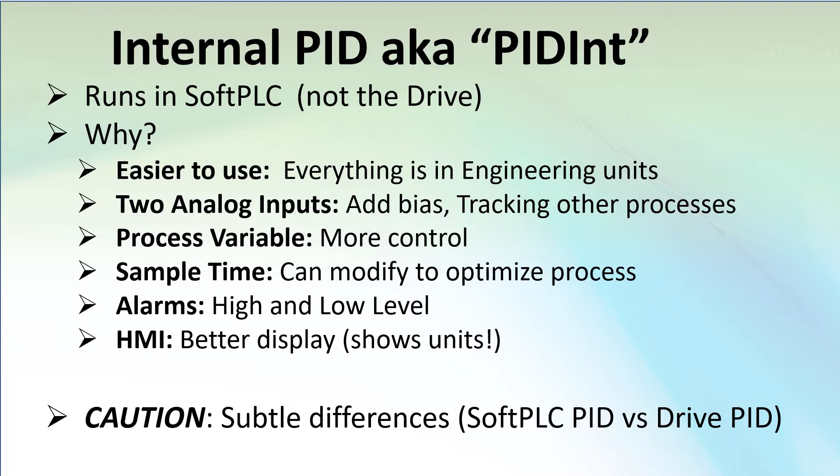Now there's a lot of subtle differences between this Soft PLC PID implementation and the one that's in the drive. So you can't just take the drive's version and copy it directly over to the Soft PLC version, what the manual calls the internal PID version. So if you're thinking about using the Soft PLC version of PID, it's really worthwhile to take a few minutes to watch this video where I point out all those differences and subtleties. It'll save you a lot of headaches.

Here we go. I'm using the exact same hardware that we used in the PID Quick Start video in part 1, which is interesting because the I/O card that comes with that drive only has one analog input. That's important. If you aren't going to use the second analog input that the internal PID implementation has, which we aren't in this demo, then you don't have to buy an I/O card with two analog inputs.

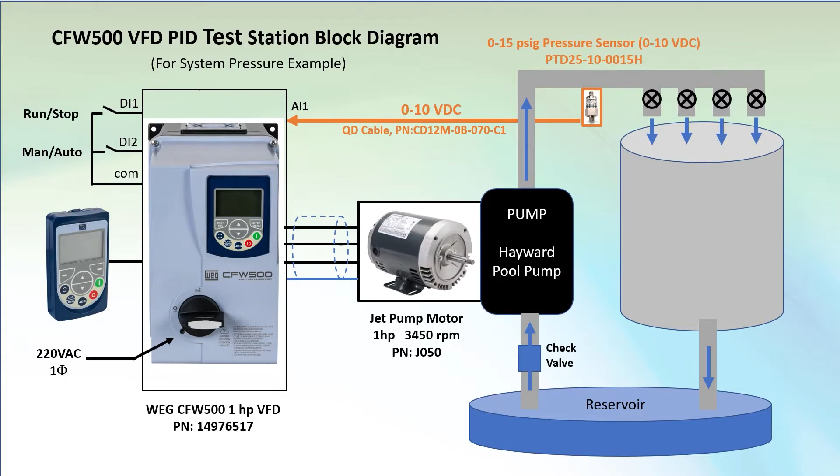I like that. This is my configuration worksheet for this internal Soft PLC version of PID. And while at a quick glance, it looks a lot like the drive's version, once we've taken a closer look, you'll realize it's quite a bit different. This motor section is identical to the drive's version we used in the Quick Start videos, so I'm not going to spend any time on that.

Now, if you don't know what the state of your Soft PLC is, then go ahead and reset it to factory default by setting parameter 204 to an 11. That doesn't affect any of the drive parameters at all. I'll do that just so you know exactly where I'm starting from.

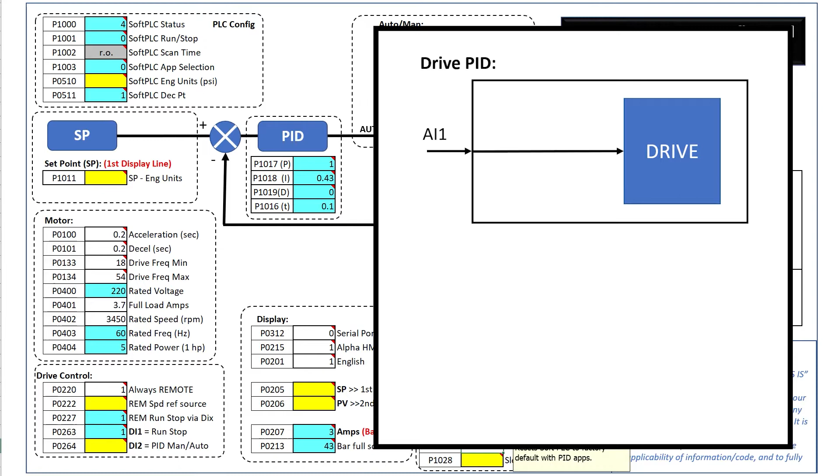Now, the drive section has two differences. In the built-in PID, the frequency reference came from analog input 1 into the drive, right? But in the Soft PLC version, the analog input feedback signal comes into the Soft PLC, and then the Soft PLC sends the frequency to the drive. So instead of a 1 here, we put a 12. That's one of those subtleties I mentioned.

It's important to note that the Soft PLC's bumpless mode works in both directions, when going from manual to auto or from auto to manual. The drive's PID only does it in one direction, from manual to auto. Another one of those subtle differences, and yet another reason to prefer the Soft PLC version of PID. It gives you more control over the transition. We're going to leave it off for this video to keep things simple.

You can learn more about bumpless mode in this video, which is on the WEG CFW300 drive, but the same concepts apply. And while we're here, let's set the manual set point to 0 so we don't get any surprises when we turn this thing on.

One of the things I like about the Soft PLC version is you can do everything in native engineering units. You don't have to enter a 60 with an implied decimal when you mean 6, for example. To do that, you set up the units in parameter 510, we want PSI, and a decimal point in 511. We'll use the default single decimal place.

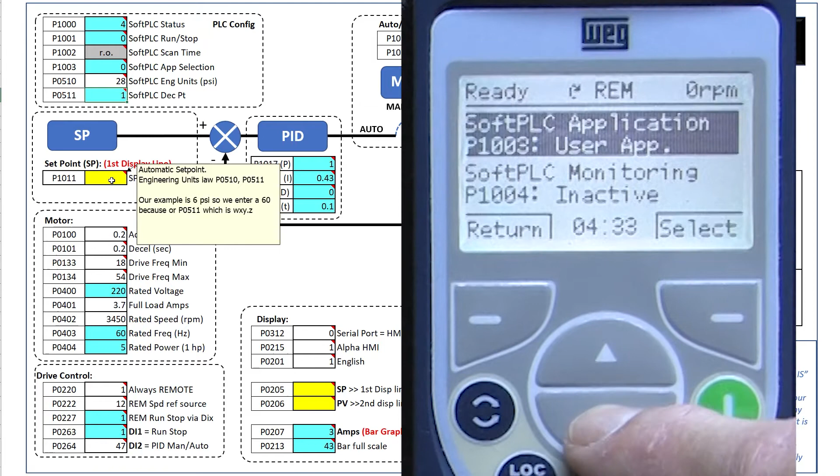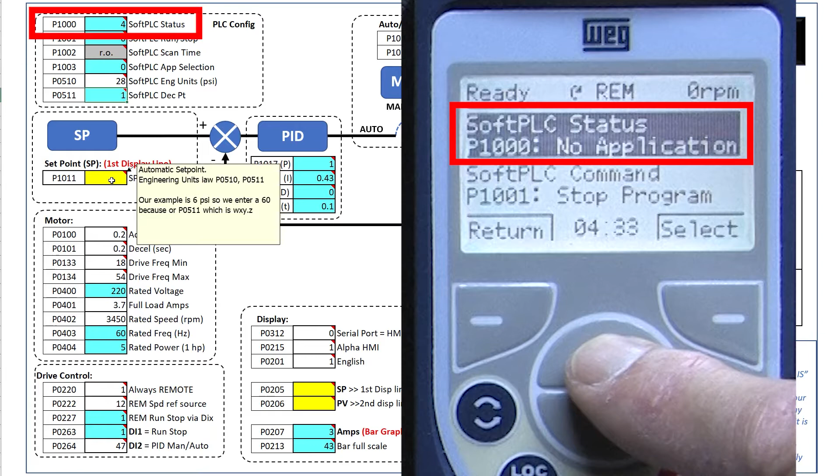So now, if we want to enter the set point by going to parameter 1011, there is no parameter 1011. If I increment the parameters, it skips from parameter 1004 straight to parameter 1. What's going on? Well, if we go to parameter 1000, we see it says no application because we haven't created a PLC app. And since we don't have a custom user program, there aren't any parameters to go with it.

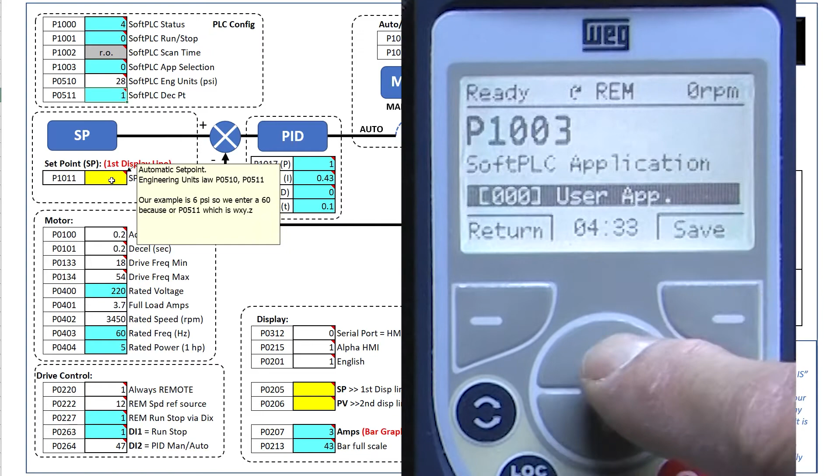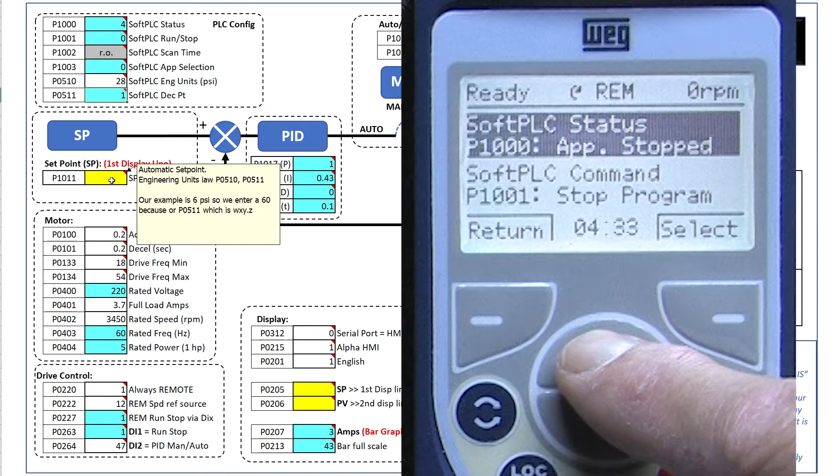We want the built-in or resident Soft PLC application, so we go to parameter 1003 and change it to a 1. Now if we go to parameter 1000, we see there is an application and it's stopped. Now it's important to note that this is just like any PLC. The PID application has to be stopped before making any changes. To do that, you just go to parameter 1001 and change it from a run to a stop. Also, the motor has to be stopped to stop or make changes to the soft PLC.

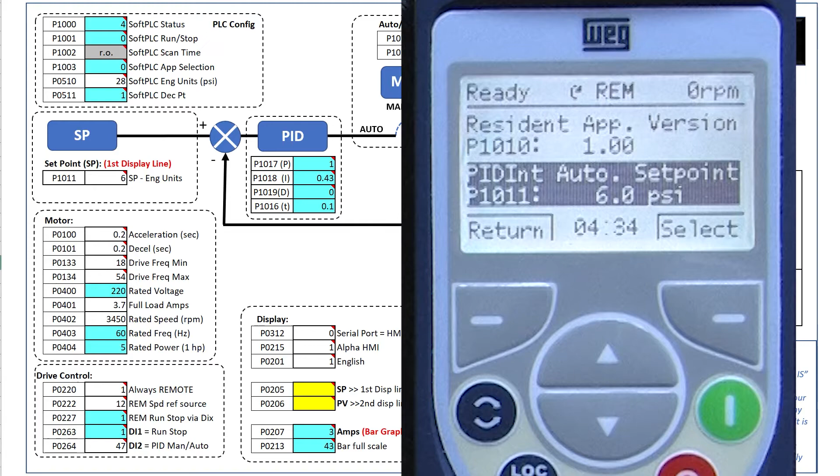Now we can go to parameter 1011 where we can change the set point. Again, notice the set point shows up in PSI. We want 6 PSI, so that's what we enter. We don't have to remember to add that implied decimal. The Soft PLC app does it for us. For me, that's a big advantage of the Soft PLC version of PID because it makes my life easier. All of the PLC configuration stuff is in the upper left corner to remind you to do that first before making changes to the Soft PLC's PID application.

Now you may remember that the drive's PID had a filtering option here where we could filter the analog input. The Soft PLC version doesn't have that. Why not? Well, because it's redundant. The analog input already has filtering built in. If you need filtering on the analog input, just use that.

We'll start with the same PID coefficients we used in the Quick Start videos, but notice that they go to the Soft PLC parameters, not the drive parameter numbers. You can tell because the Soft PLC parameters are all greater than 1000. And look at this. The Soft PLC version gives you control over the sample time, which for some applications can be real important. Knowing the sample time is critical when optimizing PID using some of the techniques we outline in other videos. That's yet another benefit of using the Soft PLC version. Now, most of the time, the default value is fine, so that's what we use here.

The process variable is in parameter 1013, and again, it's in true engineering units. Forward and reverse acting is a little different. Another subtle difference. In the drive's version, you simply chose forward or reverse. In the Soft PLC version, this is where you disable PID or you choose forward and reverse. We want forward or direct acting.

This is where you specify how the second analog input reacts with the system. You can add the two analog inputs, take the difference, or take an average. This is great for those times when you want to inject an offset or even track another process. Another advantage of using the Soft PLC version of PID. We aren't using a second analog input in this demo, so we'll just leave that to default value.

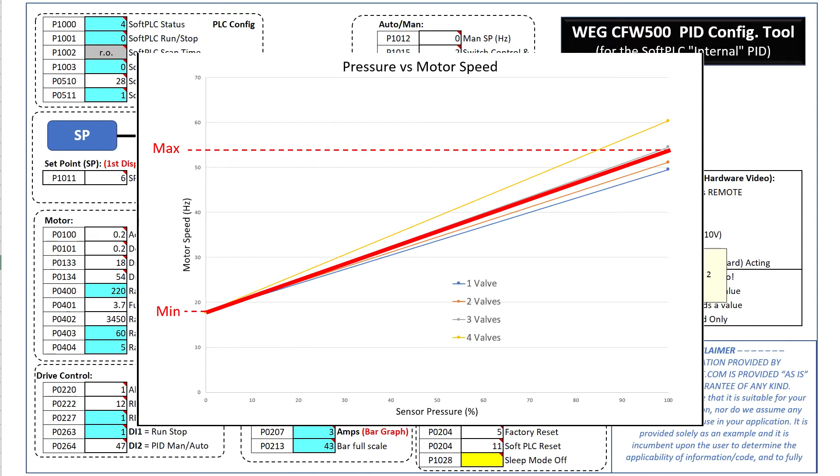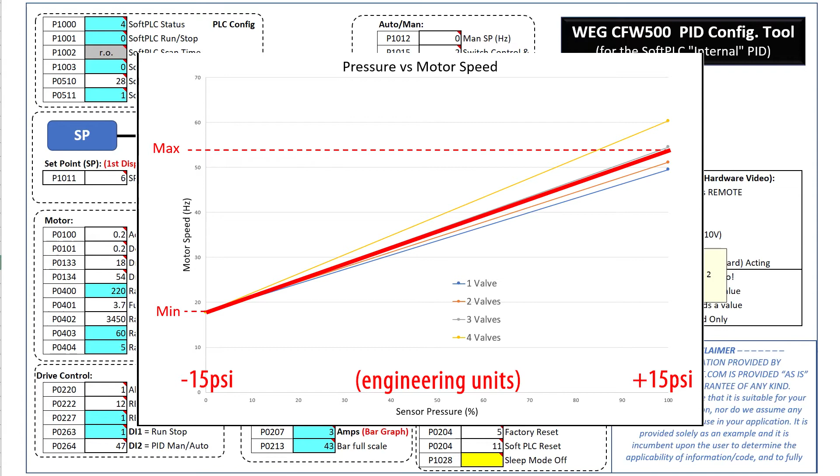This is where the Soft PLC algorithm gets its scaling from, which is cool because maybe you have a -15 to +15 PSI sensor. You just enter those numbers in here and you're done. No fancy manipulation of the analog input to worry about. Another subtle advantage of using the Soft PLC version of PID. Now we're using a 0 to 15 PSI sensor, so I'll enter those values here. Again, in true engineering units, without having to worry about the implied decimal.

So nice. Configuring the analog channel is almost identical to the drive version, except we need to tell input 1 it's being used for the PID feedback signal to the Soft PLC, not the drive. In the drive version, that was done in parameter 203. And I'll add a little filtering on the analog input. Again, keep that small. Large values will reduce the responsiveness of the PID algorithm.

We're not using sleep mode in this demo, so let's go to parameter 1028 and set it to a 0 to turn it off so it doesn't surprise us. You can learn how to use sleep mode in the sleep mode video. Finally, we need to configure the display. It's the same as the Quick Start video, except the set point comes from the Soft PLC set point, and the process variable comes from the Soft PLC process variable. Remember that we set the Soft PLC units back here.

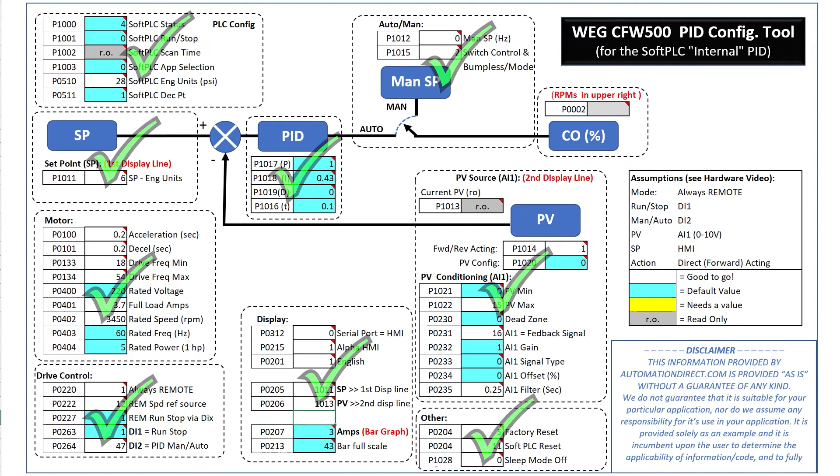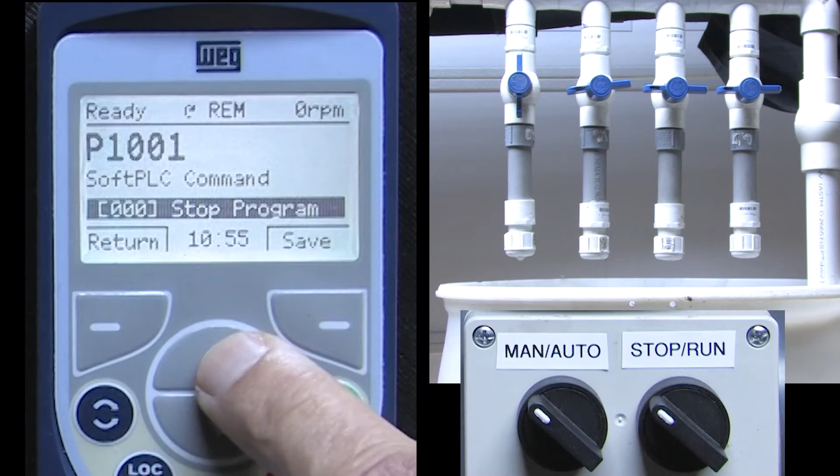Well, great. All the yellow cells are gone, and we're left with white values and blue defaults, which tells us we have a complete PID configuration. I went ahead and entered all those into the drive. In parameter 1000, we see the Soft PLC is still stopped, so we go to parameter 1001 and set it to a 1 to enable the Soft PLC and get it running. And parameter 1000 tells us the Soft PLC is now running.

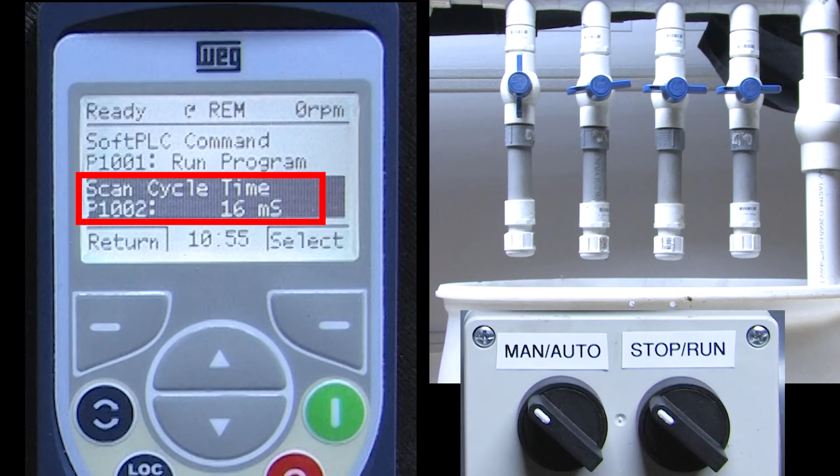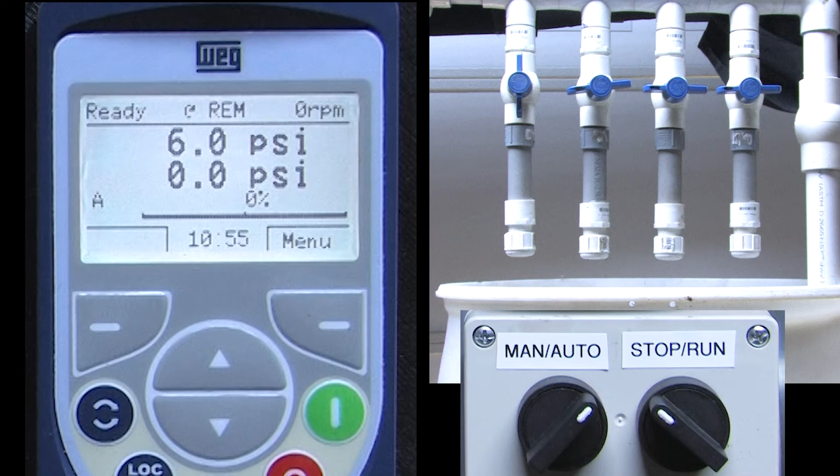Perfect. In parameter 1002, we can also see the scan time in milliseconds, another thing you can't do with the drive version. Back up to the display main level. Again, I love that the Soft PLC version of PID shows clearly on the display exactly what the units are. Let's start in manual mode, which is this way. Yeah, the Soft PLC uses the opposite contact definition relative to the drive's built-in PID. I'm going to overwrite the labels in the video to serve as an obvious reminder they're different.

Okay, we're in manual mode, and the manual set point in parameter 1012 is at 0% of the motor speed. Switch to run, and the drive takes the motor to the minimum speed we put in parameter 133, which corresponds to this many RPMs. Let's change it to 50%. And once I get past the min speed, the motor responds as I scroll. Manual mode is a great way to test out your system. In particular, you can use this to make sure the motor is spinning in the right direction. Our pressure is increasing as the motor RPMs increase, so we're operating in the forward direction.

Perfect. Save that and escape back to the main display. We see the RPMs up here and the motor's current down here. I'll switch to auto mode, and sure enough, PID automatically adjusts the motor speed to get the system pressure to the 6 psi we asked for. But it's taken a long time. Apparently, the Soft PLC scales the PID coefficients differently than the drive's PID does.

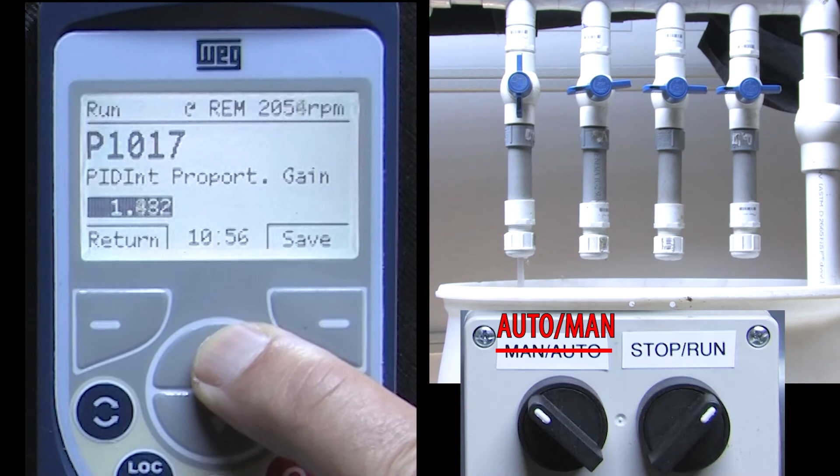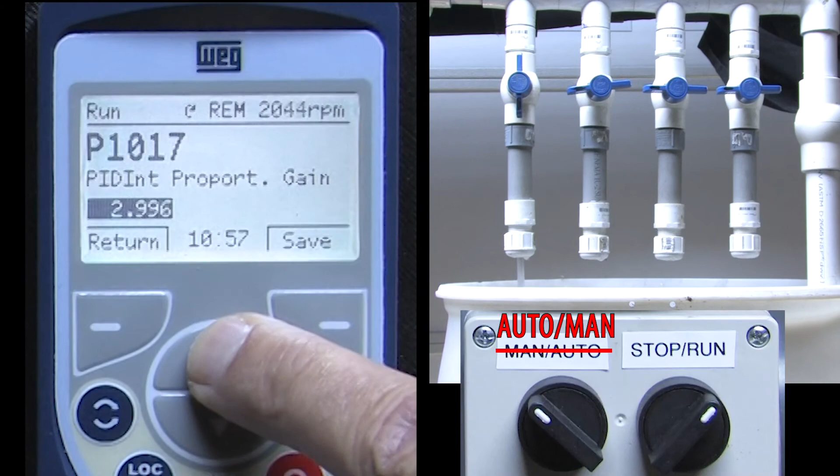If you watch any of the videos that show you how to tune a PID loop, then you know I typically just double the P coefficient until things oscillate and then back off. If I go to parameter 1017, I can adjust the gain in real time. Whoops, went too far. My system started to oscillate. Let's try a gain of 3. Open and closing valves. Yeah, that's a lot more responsive. We can play with this all day, but you get the idea. Watch this video to learn how to tune a PID loop.

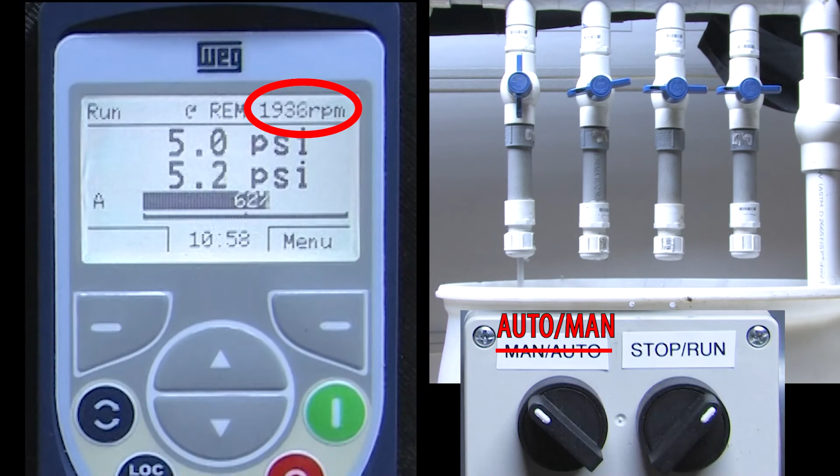If we change the system pressure to 5 psi, PID automatically adjusts the motor speed to accommodate it. Perfect. How about 7 psi? Yep, the drive tracks the new setting almost as fast as I can change it. Cool. Well, that ought to be enough to get you up and running.